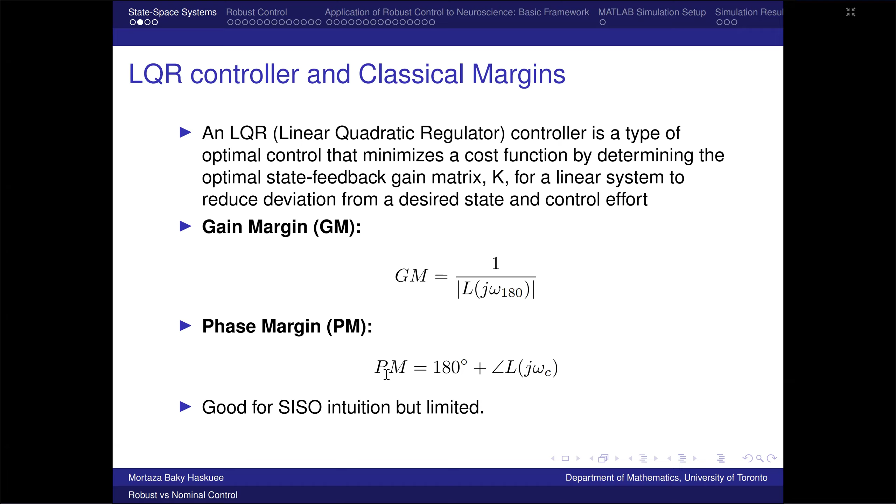So in LQR control, which is linear quadratic regulator control, as you see, we have different measures. The classic or standard measures or margins are the gain margin and the phase margin. Actually, the gain margin and phase margin are used to measure how the system will respond to any input. As you know, the phase shows the angle of the system, and the gain margin shows the magnitude of the response. Also, these are single, but to combine them, usually the disk margin is used.

That is a combination of both of them, the magnitude and the angles. So in the disk, you can see where the system is stable and where the system is not stable. Within the disk, the system will be stable, and out of the disk, the system will be unstable.

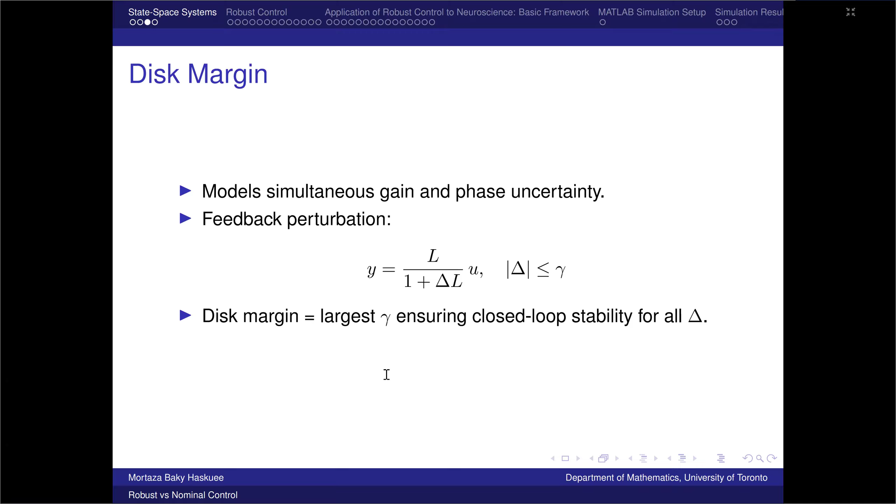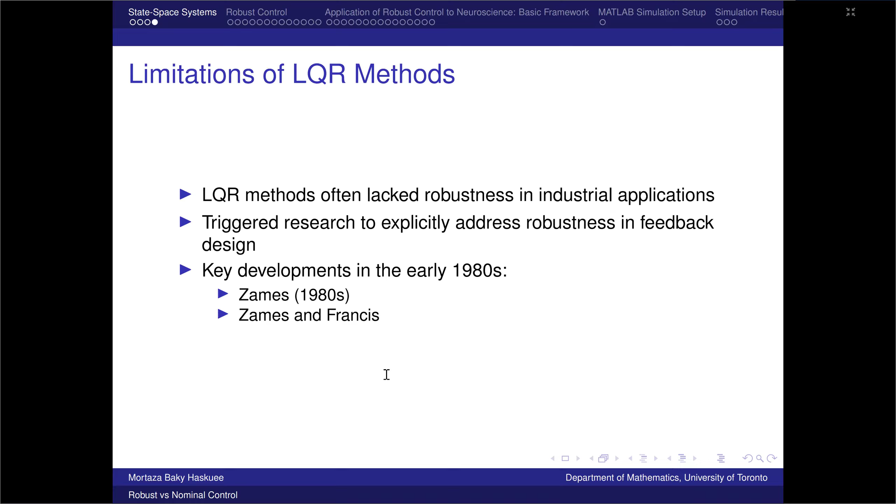However, there are some limitations for this LQR system because they do not consider robustness in industrial applications like the neuroscience that you are working on. So from the beginning of the topics about robust control, there have been more critiques against LQR, and efforts to develop tools to control for the uncertainties that we have.

So actually, the main goal of control is to stabilize the system. As I mentioned, when you have a mathematical system, an input and output, and you have a reference system, there will be a perturbation and deviation from the reference system. So to stabilize the system, you can use control like PID or full control. But there are some challenges.

The first is that in reality, systems are different from what we model. The model is so simplified, and this simplicity may ignore some parts that are important in reality. So this is the main concern. There is also uncertainty in the parameters. If we have uncertain parameters, we will lose robustness.

And also maybe there are some external disturbances in the system. This was what I incorporated in the first mathematical model at the beginning, in addition to the U input. Also maybe there are some challenges regarding the sensors that you measure with. And generally, LQR is used in single-input, single-output models, but in multi-input, multi-output control models, we need more robust measures. So we need robust control.

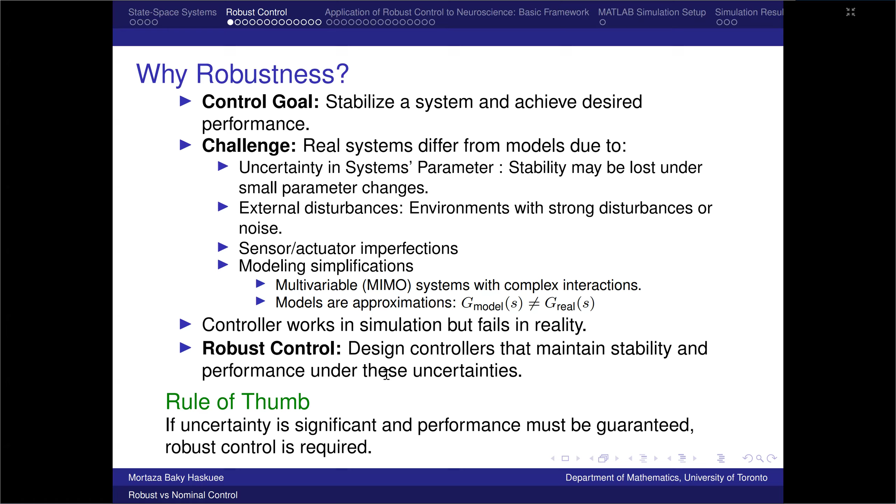So these challenges require that we think about robust control. As I mentioned, not only the environmental uncertainties are important, but also the worst-case control is important. In a paper that I was working on, the concern was that in the pandemic, we have containment policies. The goal of containment policy is to control the outbreak. So the government sets this set of policies as the input to the system.

But the uncertainty about the behavior of individuals in response to those policies was my concern, how it can affect the results. So I considered the response of individuals to the containment policy as an external shock to the system. That disturbance was modeled and we controlled for it. These cases are called in the literature worst cases, that is, extreme cases that can happen. To control for worst cases, we use robust control.

Why are they extreme cases? Are you saying the public responds to the policy in an unexpected way? But is there a reason for classifying that as an extreme, strong perturbation versus just a small effect?

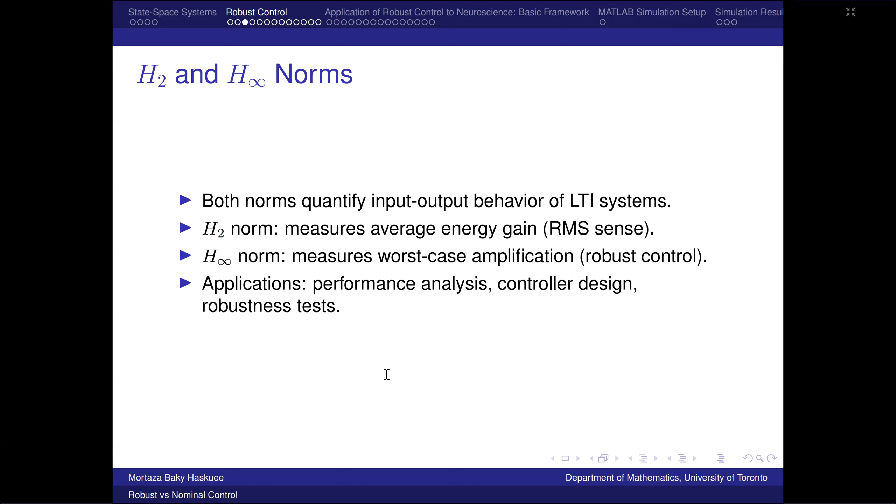So how are the norms defined? Because basically similar to norms, but... Yeah, I will explain it. For the applications, we can use these norms for performance analysis and control designs.

However, the H infinity optimal control approach is important in this talk and I want to focus on it more. If we have a specified model with additive perturbation and output disturbances, we can perform constrained optimization, and our objective is to seek a controller that is feasible for robust stability, and also to incorporate the cost of this controller as well.

So here is the definition of H infinity. This is the basic definition: for example, this is a transfer function, and in this case this is the supremum of the sigma. So it is those peaks that you consider. For example, if you have a transfer like this, this is the maximum, or the least upper bound that can happen, the peak that you can compute. If this norm is less than 1, it guarantees that the system is robust. Otherwise, it will be amplified and it will be unstable.

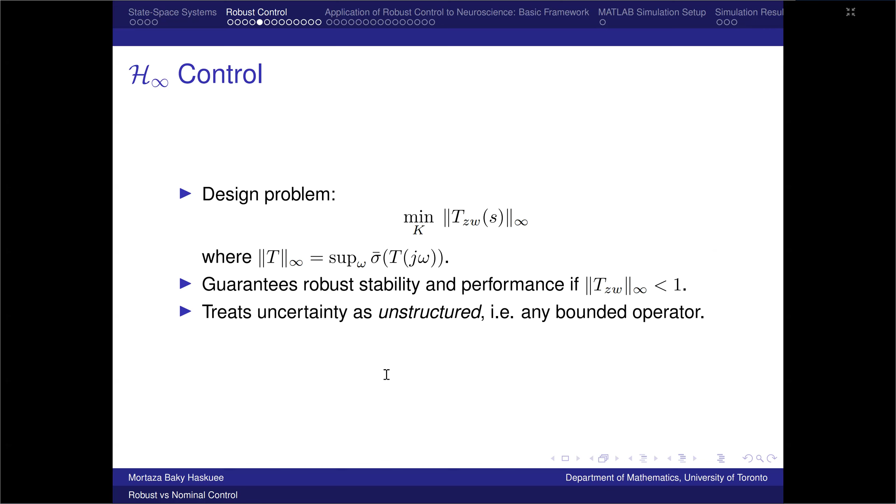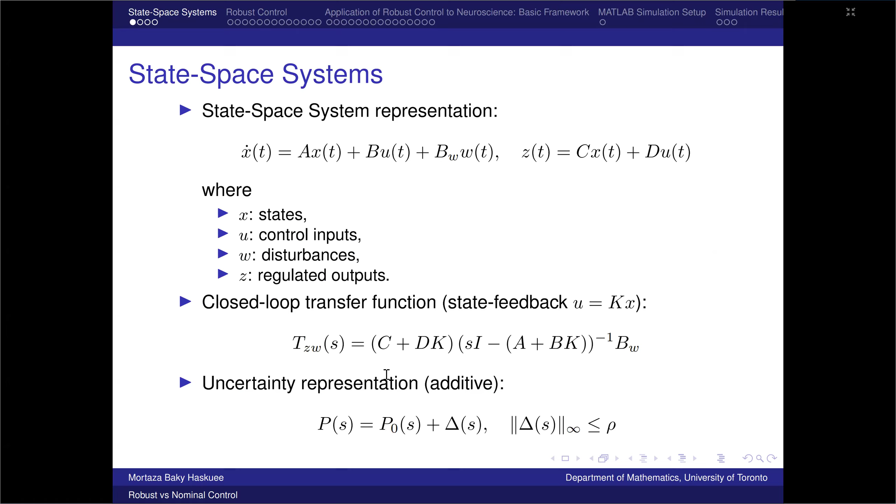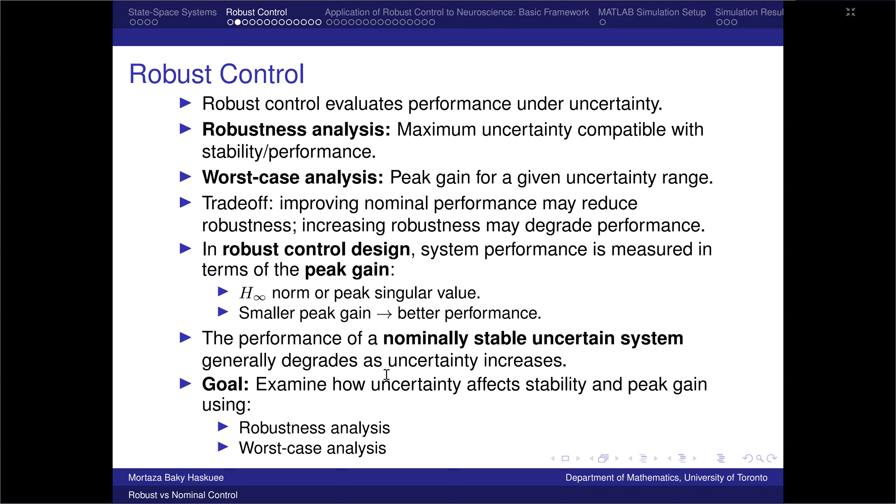Here I explained that this is the transfer function. Suppose that you have just one input u_t; then usually the transfer function will be this part. But in case we have external shocks as well, I incorporated them, just to represent a simple model. Is there a standard simple physical example? Yeah, that's just to represent what the norms mean, the H2 and H infinity control. I mean, what's the standard physical example?

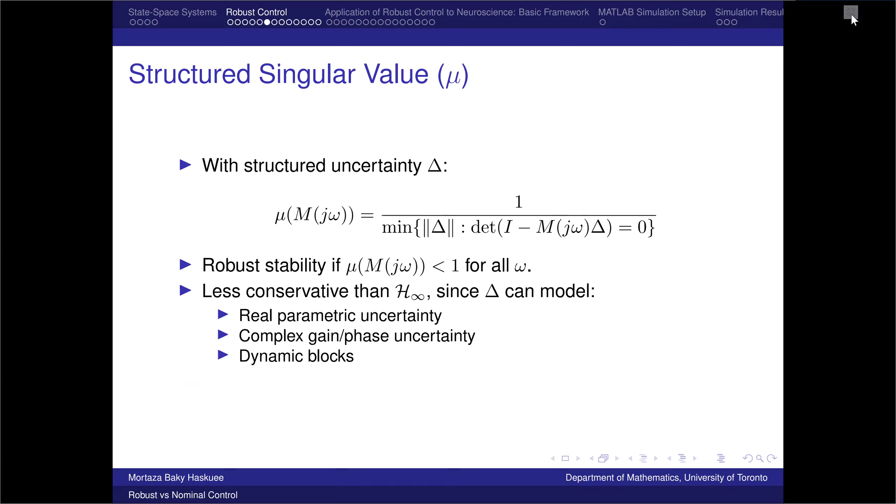Here is a simple example. Let me share this one.

In this example, I try to represent a system that is an LTI system, a state system we have, and the matrices show the coefficients in the system. The matrix A shows the state of the system, and U is the input. Matrix B is the coefficients representing this.

Based on this, I computed the result. This is the transfer function that I had, and this is the transfer function I was talking about.

In this simple example, G is the norm in L2, because the model is 2-dimensional. So we can compute the integration of the trace of this system G prime. Then we can use the Lyapunov-based formulation to compute that. Generally, G is the trace of the P that you asked about.

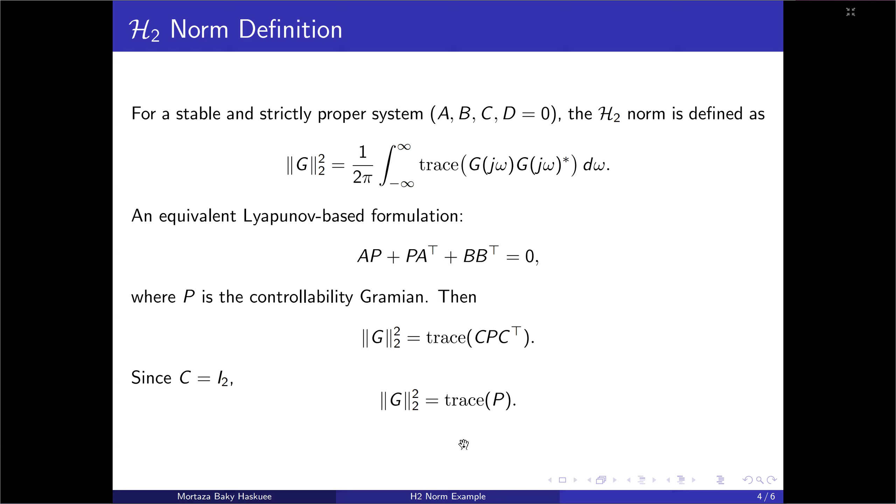I think what John was asking was if there's a physical example you could give, like maybe a pendulum. I have nothing in my basket right now, but I wanted to show this simple computation.

For example, I computed here the norm that is less than 1, and the system will be stable. At least we can conclude that this computation shows the system is stable.

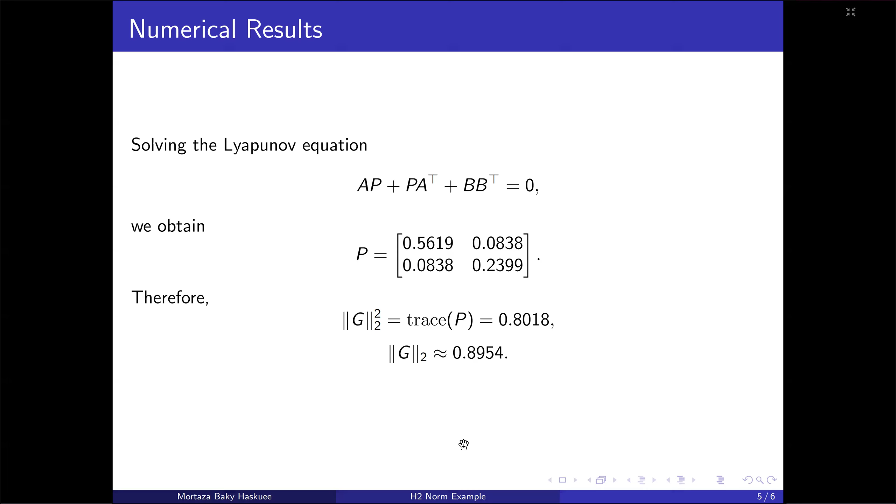Can we just agree on a simple metaphor or whatever? It doesn't need to be worked out numerically, but maybe I can explain that. The transfer function is a relationship from the output.

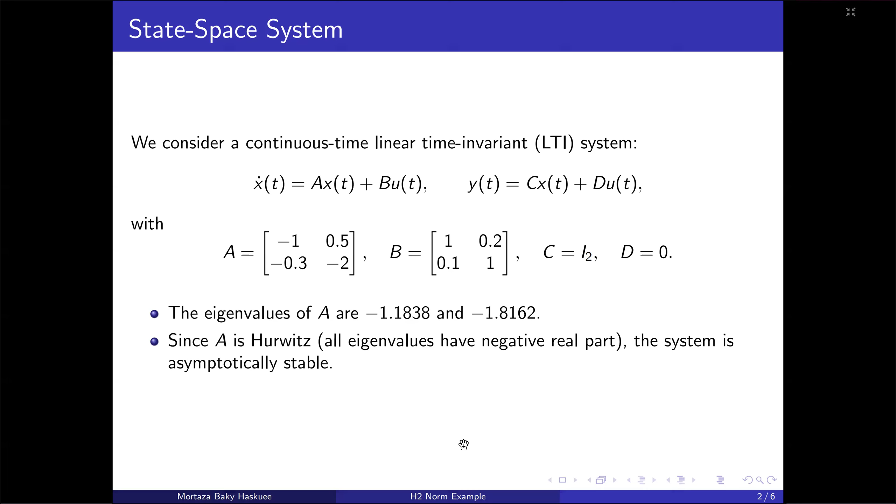So think about it in discrete time. If the gain, the transfer function, is smaller than one, it's always going down, and that's stable. But there's also the frequency domain, meaning at any frequency those gains should be smaller than one. That's like H infinity. So the relationship is always smaller, so it can go down - it's kind of the worst case.

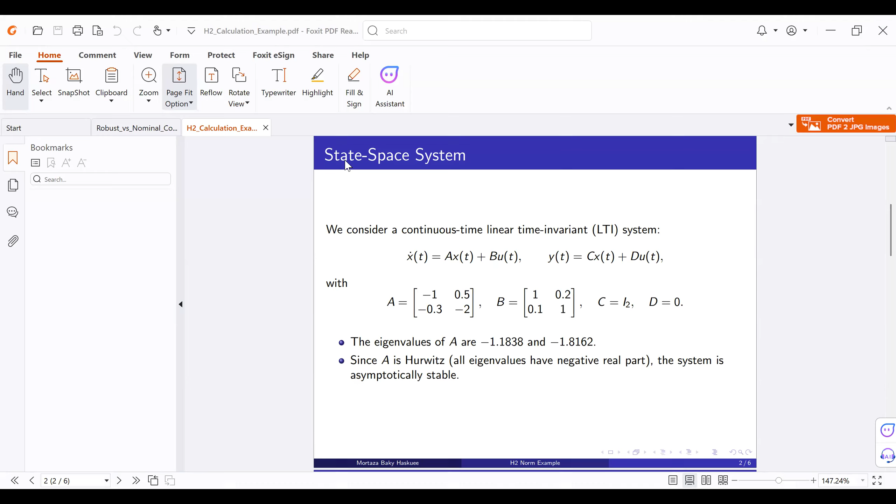And also let me - people can also do it after the pendulum. When you have something move and you want to stabilize it, what are the forces you need to put on to stabilize, right?

Yeah, that was for H2, and here I computed the H infinity. So this is a system again - a MIMO system, 2x2, two inputs to two outputs.

So again we compute, and here is the supremum of the sigma we were talking about. The interpretation is that in the worst case, L2 shows the gain we have from the input to the output - the gain from the impact of the input to the output.

The system is defined in 2 dimensions here.

And this is the bounded real lemma - I don't want to talk about this lemma in detail. Here is the G infinity, which is also 4% above what you know about the normal system. When omega is equal to, and for omega peak is 0, if we assume D is 0, then this will be 4% above the normal. The gain will be 4% above the normal gain.

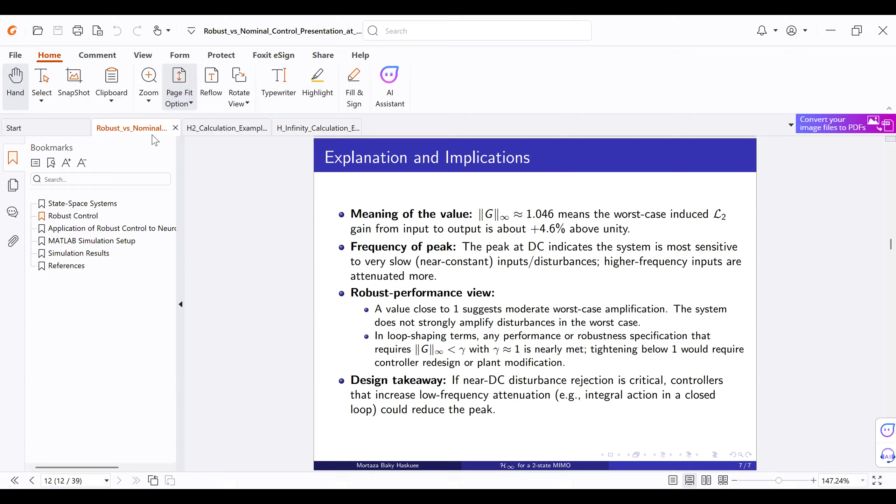No, it's stable because it's compared with the norm. And what's the norm? Just let me show here, let me go to this one. I think these figures will solve some of this.

Maybe I couldn't explain this well. Actually, the nominal is when there is no disturbance, external or environmental, so the system will be here. If you have uncertainties, when the uncertainties increase, this performance shows that the system performs degraded, it will be worsened.

So this is the maximum tolerance that the system can tolerate, the maximum level of disturbance that the system can tolerate. Above that, the system will be totally unstable. Below that could be stable. This red line is the maximum tolerance for the system. So above that point, the system will be unstable.

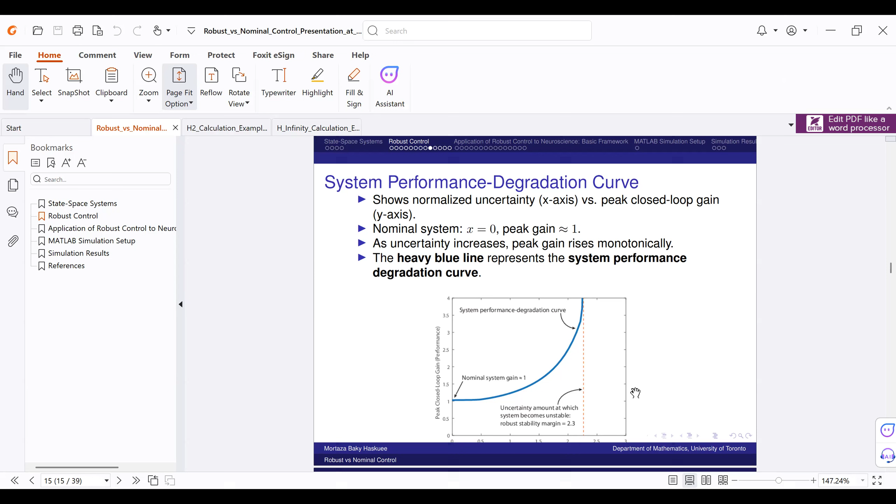So here we can also set, but the modeler can set, for example, in this figure, let me show here. The modeler set the maximum tolerance for this point at 2.3. So below that, the system is considered stable. So the gain is from here to here.

I think I have the figure for that. This is the figure, for example, this is the point that we said is the worst case, and this is the worst case gain when we control the system using robust control.

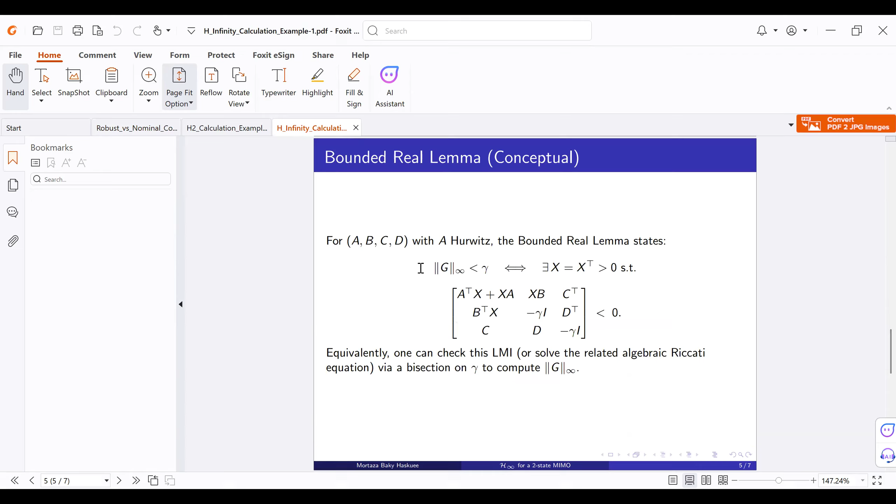How do you calculate the worst case threshold? In this example, generally, I showed that in the worst case we use the transformation and H infinity. Here in H infinity I computed this, this is the procedure to compute it, and this is H infinity that is, for the worst case, H infinity is 1.04.

But this is below the norm, right? This is the point, if you set that H infinity be less than a threshold, you want to stabilize the system, and you set that so it should be, if it is below that threshold, it is stable, otherwise it's unstable.

For you, when you set the threshold, this is a good question. Yeah, you have to work... to me, so you could do the threshold like an interval of safety. Yeah, the safety needs for the system. You can set the interval for the safetiness, and then you can say, okay, this is the threshold, the minimum threshold, maximum threshold, this interval.

So below that threshold, the system is stable. Because we cannot totally develop a model to follow the system 100%. So this is the control, we wanted to stabilize the system. So we set the threshold and say, okay, the maximum threshold is this, and we can tolerate up to this point. In the banking system also, they use this stress testing in the case that there are financial disturbances.

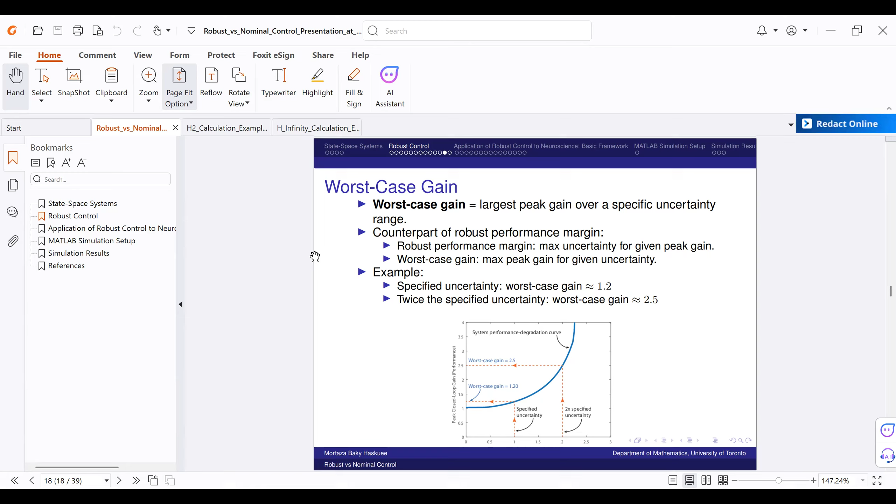We can say, okay, this is the safeness range, and then we set the conservative, for example, threshold. In terms of the comparison, I think we should wait for this point as well.

There is another measure that maybe answers some questions I wanted to talk about: a structured singular value, or mu. In terms of H infinity, the shocks are not structured, but you can have structured disturbances, and in that case, with the structured uncertainty, we can use mu. This measure is also used in robust control alongside the H infinity measure, which shows the robustness of the system. So this is another measure. I didn't work on mu to measure it, but it's also less conservative than H infinity, because delta is the structured disturbances that we have an idea about.

Maybe some confusion about the feedback loop, the closed loop transfer function based on the open. My talk is about closed loop, not open loop. The G right now is closed loop. That means the norm should be less than 1, right? Yeah.

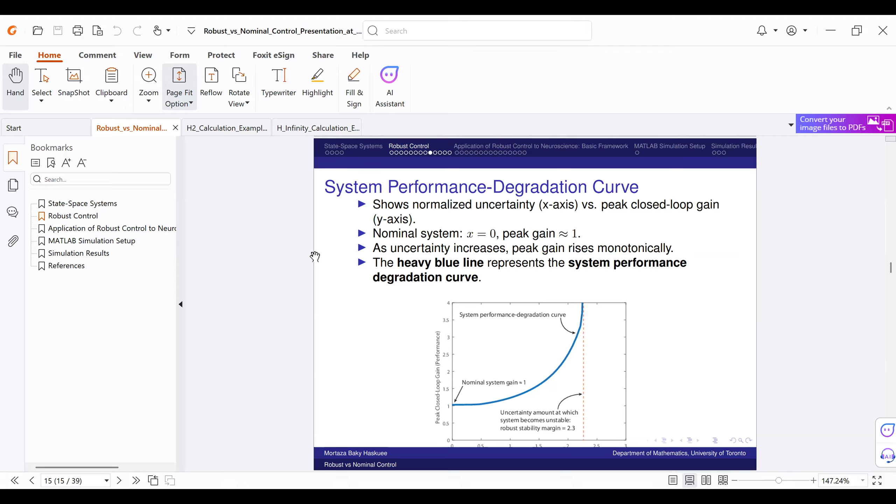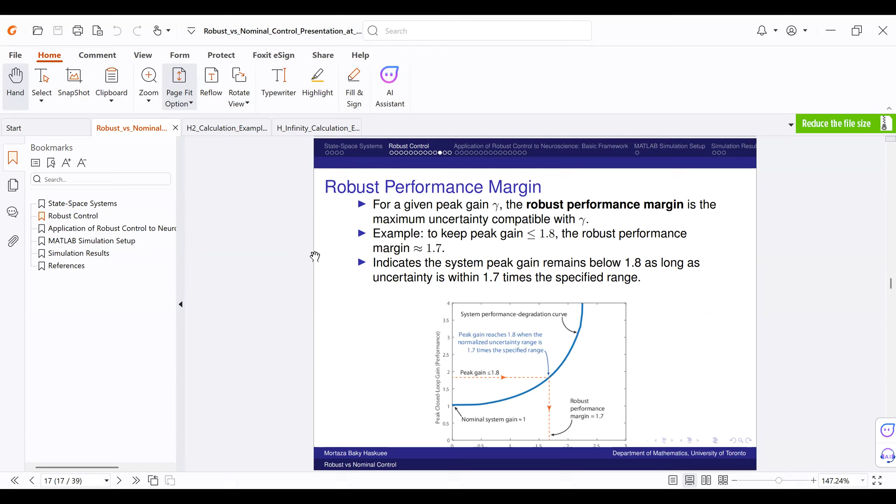So this is just to show what the robust stability margin is. For example, when the peak gain goes to infinity, x will be 2.3 times, and the system becomes unstable. The system is totally unstable regarding the worst cases, here 2.3 in this example. And here I explained this.

As I explained, two measures are used for robust control, but there is a mix of H2 and H infinity that some research uses to set the control system. In cases with Markov jumps, mostly in differential games, they use mixed H2 and H infinity control. For example, with multiple players, even in neuroscience, you can assume the nature or the body is a player, and you as a physician who sets the input are another player, and you can set up a differential game.

One of the applications of robust control is differential games. Sorry, briefly clarify again, what is the difference between H2 and H infinity? I explained that H2 is for the regular case, but H infinity control is for the worst cases.

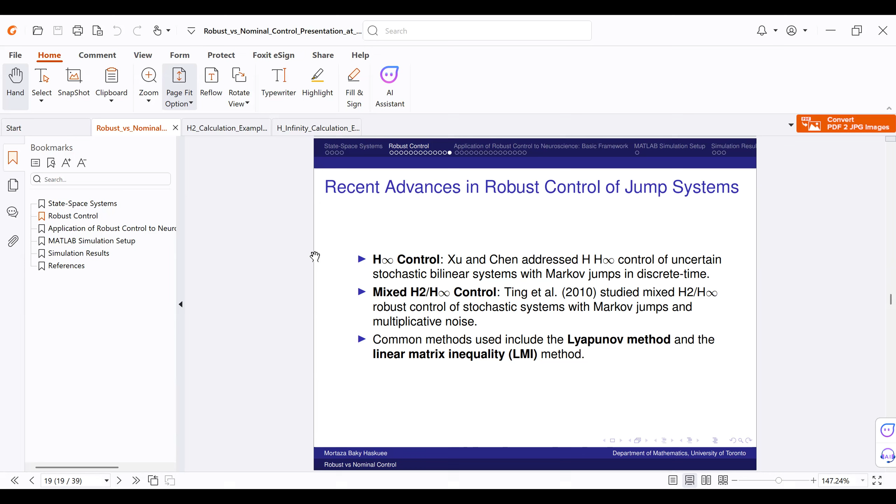Regarding neuroscience, I am not an expert in this area. I grabbed some ideas from talking with you and reviewed the literature. Is there any concern about robust control in neuroscience or not? That was my question. I found that some papers have mentioned the importance of considering these types of uncertainties and the room for robust control.

For example, for DBS that you have worked on in Parkinson's disease, they use pulses to suppress the abnormal oscillations, and closed loop neurostimulation adapts the input control in real time. This is the neuroscience literature that works on control. And here I mentioned how and why these are important.

I just briefly reviewed the literature. I don't know if you need it, because you are the expert. This is for me to review. For example, I reviewed the background of each paper, the mechanism they designed, the goal and impact, and the differences. I don't want to take your time on this. Let's go to this.

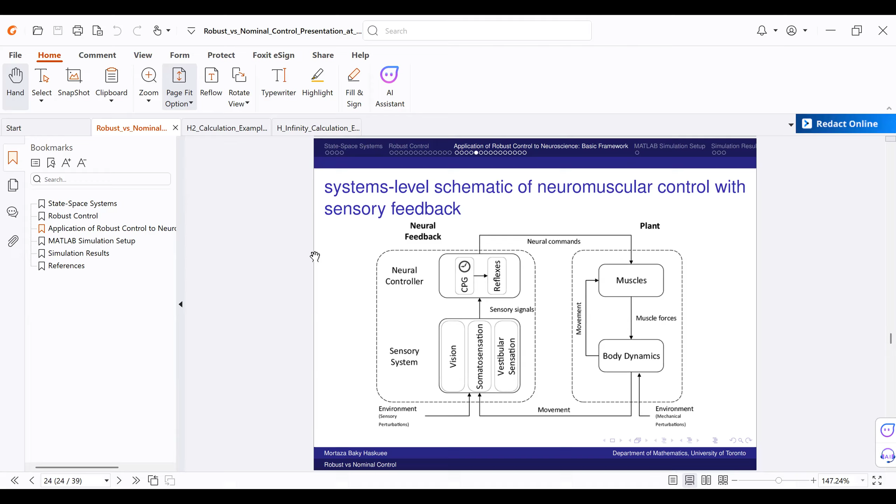But the point is that we consider both disturbances: environmental, anything that comes from the environment, and also the sensor disturbances. So here is the description of the system. The right-hand side was the plant, as I explained: muscles that execute commands by generating forces and body movement. As a consequence, the output is the body dynamics. And here is the control and the feedback that we have.

The CPG is the central pattern generator that produces rhythmic patterns. This is a type of control that is used in the literature. I got this from the literature and I explained it. And for the sensor system, we have, for example, vision, the measures, and others. This part is familiar to you. So do you know what the reason is to use the CPG?

Oh, no, I told you I'm new in this area. I just got this from the literature. There were two papers I read, I have the papers. Do you know, they justified it by kind of a normative thing? By the idea the brain should have that, as the paper explains. Based on observation, they say, okay, we have some brain rhythms, and so we want to model them.

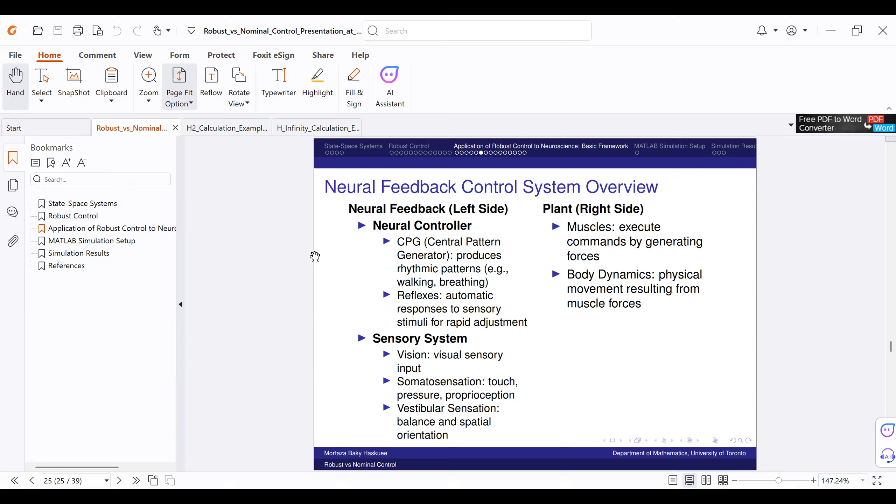The functional flow here is that, for example, we have the environment that creates the perturbations or disturbances, affecting both the sensory system and the body. Then the sensory inputs are processed by the sensory system, and the controller here, CPG plus reflexes, generates the neural commands based on the information it receives.

And then the neural commands activate the muscles, and the muscles' force produces the body movement. Again, the movement affects the environment, and the environment affects the body movement. So this loop is repeated in real time. The key point is that the system functions as a feedback control loop with continuous sensory input. That's what I explained. And the reflexes enable rapid and automatic responses.

And here I'm not sure about this, but as I understood, the CPG is like any control that produces the basic rhythmic motor patterns even if we have no input from the sensory system. I'm not familiar with this part, that's what I got from this.

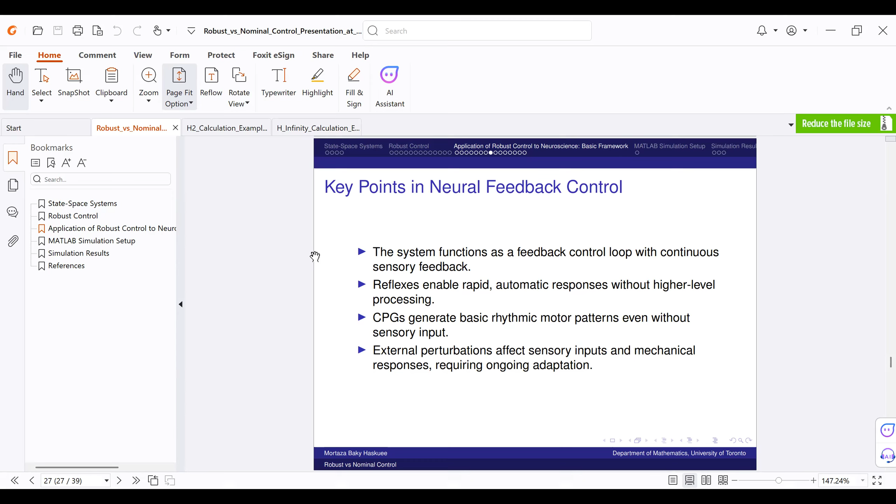And the most important is external disturbances that affect both the sensory inputs and the mechanical responses that come from the body, I mean the body movement. Okay, so here is our explanation.

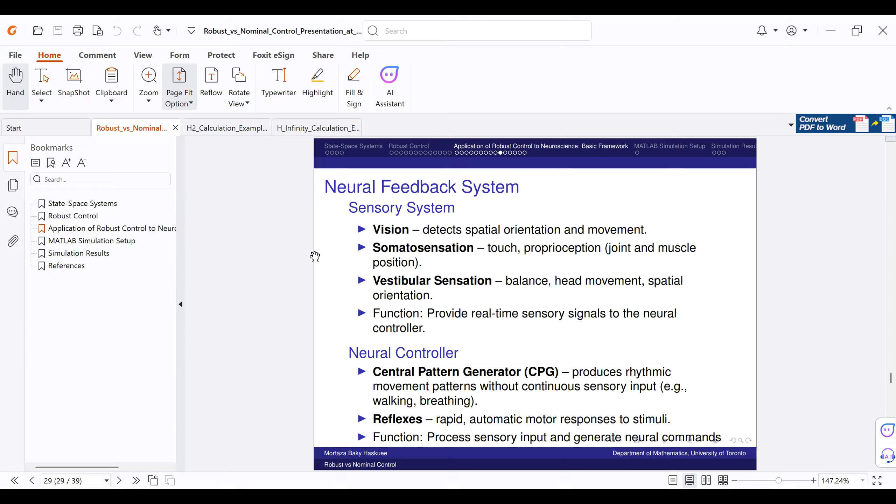Yeah, again, I went in detail. That was a summary. I don't want to go into these loops of how it happens, you know. So, okay, let's go to the robust control.

So actually, the goal was to control for those external disturbances in the system that affect both the output, for example, the body movement here, and also the sensory measurements, okay? So here, the objective is to provide a unified and solid approach for the stimulation control under uncertainties, okay?

So we model the brain-stimulator interaction as a stochastic differential game. As I explained, we can have the nature and also the controller, so there will be a game between them. So this handles both randomness and worst case, as we explained, provides a systematic method for the controller system, and bridges between neuroscience and control theory.

And the outcome is the basis for designing adaptive, robust and patient-specific neurostimulation strategies, because you know that in control systems, one of the critical points, and the basic point in robust control, is that the systems are not similar.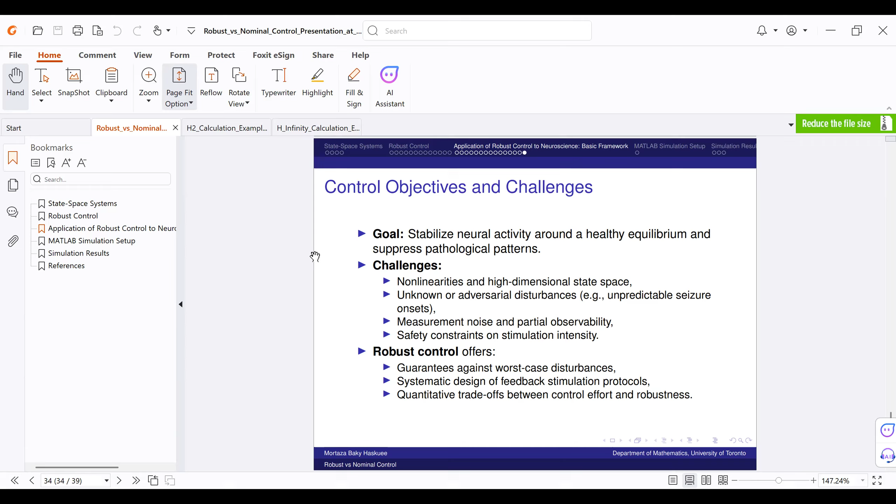Okay, however, robust control guarantees against the worst-case disturbance and systematically designs feedback stimulation protocols that are good for the cases where the patients are different. And actually, there is a trade-off between the robustness, and this can be used for controlling the trade-off between the control, the conservativity, and also the performance.

So here is a simple model that I simulated. I assume that the dimension of the model is 2, so we have 2 state variables. Also, time is 10 seconds. It's not a long time, and I break the time into steps of 0.01, and for the initial state I assume that the x1 and x2 vector are here, and I assume that we have the same disturbances.

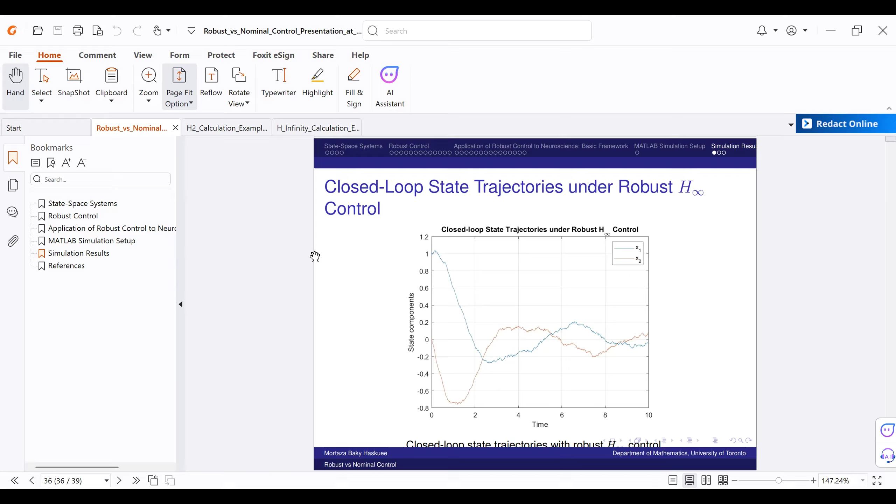Okay, the system faces the same signals, the same stochastic noise, and the same realized disturbances, and we will compare these results. Okay, so this is the basic result that I got. I don't know if you can see the colors, blue and red, x1, x2. So these are the closed-loop state trajectories. I solved the system and simulated the closed loop.

than the regular control. It is not the case that the robust control is always better than the regular control. We should consider this point. Okay, so this shows up to what point.

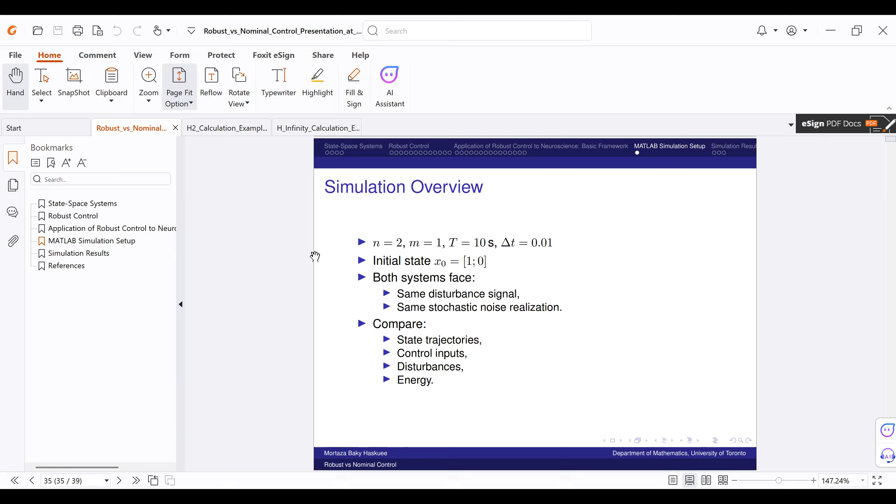The system is 2-dimensional like this, as I explained. You mean the equation behind that? It's in MATLAB, I can show it. Yeah, this is the description of the system: here is the 2-dimensional system that I assume, like the initial system that I showed you. It's an LTI system. Yeah.

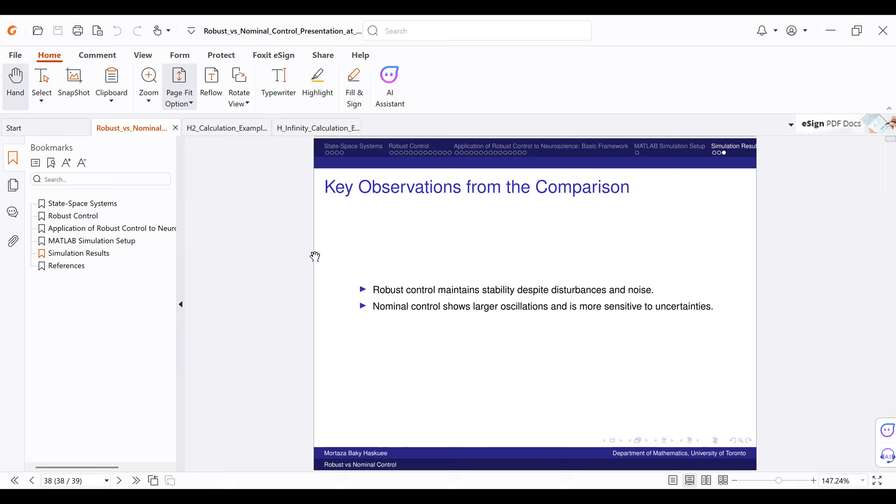So the robust control maintains stability despite disturbance and noises, and nominal control shows larger oscillation. If we consider the total oscillations, maybe we can figure that the oscillation will be higher. Yeah, we can compute the total variations, but somehow the performance is not the same; here they are the same, but the total oscillation is important to see as well.

Is this not just kind of relaxing to steady state from its initial condition? Is it stable? Oh, yeah, that's another thing, this is just to show the performance under these controls, okay? So the other is to figure the stability of them. I think I calculated, but I didn't... Do you know that this is the action of the controller that's doing this, or is it just the system relaxing to its steady state? Here, my concern was to figure the oscillation and the performance in terms of the trajectory for the state variables. In terms of the stability, I can compute them. I think I have already computed them.

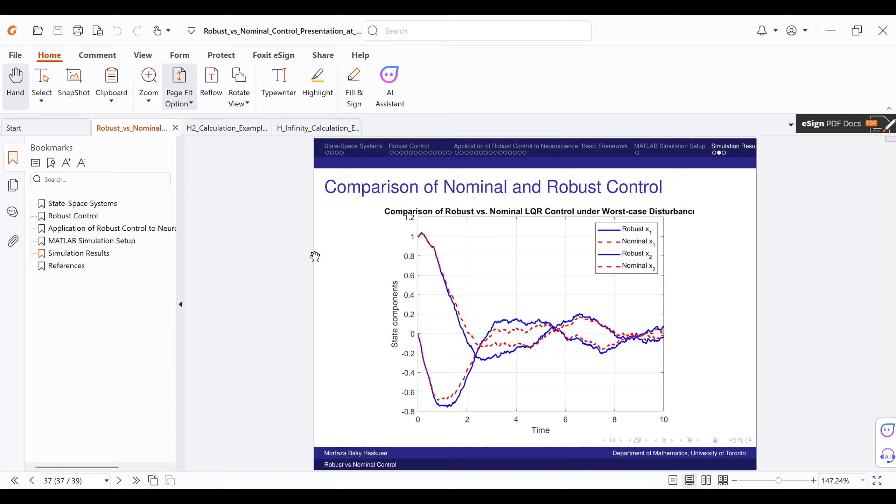Question? Sorry, actually, I know there are many questions from the technical point, the neuroscience, and in neuroscience I'm absolutely new. But I am happy that I got good feedback from you regarding the design of the system. Okay, right. That was a pleasure.

But right now we have a mathematical model for the whole; it depends how many populations you have. Each region will probably have 3 populations, so six differential equations. If you're using the model to design a controller, maybe there's some stimulus on a certain region, and you can push the EEG power spectrum toward the reference. Based on the model we have, can you design that controller? Yeah, let me involve it. We can talk about it later. Especially when they have model parameters, right?